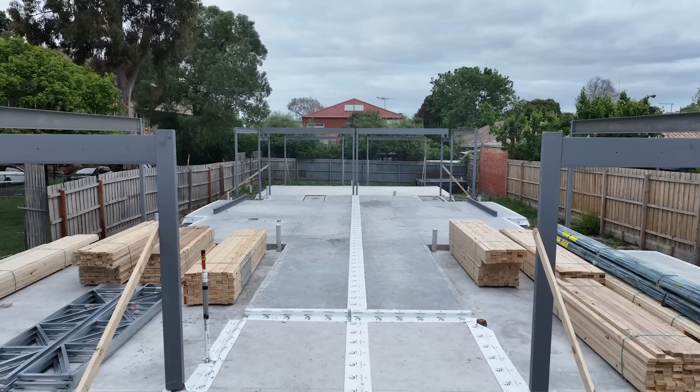Okay, we're back out on the frame, and today is going to be our first proper day building here. I was here a few days ago to film the first episode, and we marked out where all the walls are going to go on the slab. Since then, the steel has been installed, and now we've got our timber dropped off.

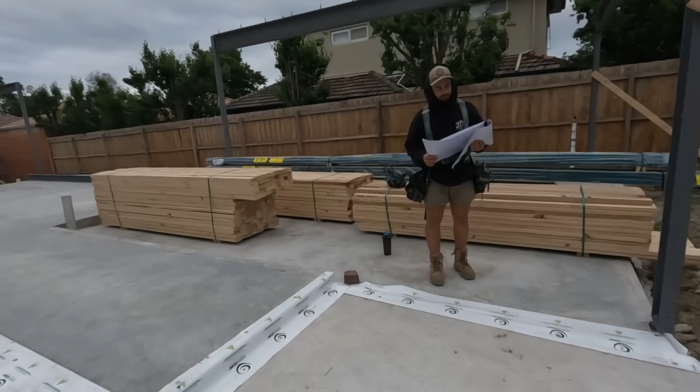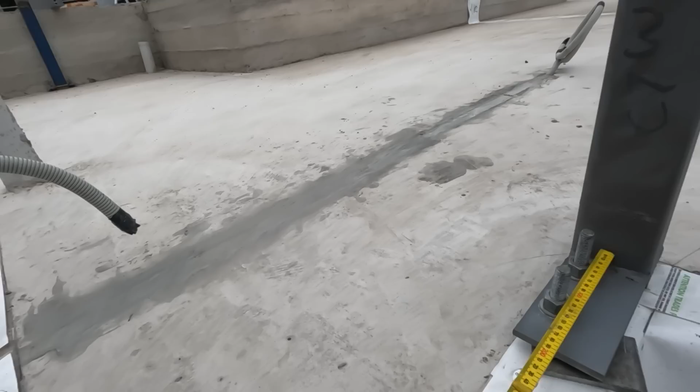So the issue we had is that these power trusses can't be checked out over this tag. The whole point of the power trusses is both sides need to be bolted down into the concrete, and that will stop it moving side to side, and that's what braces the house.

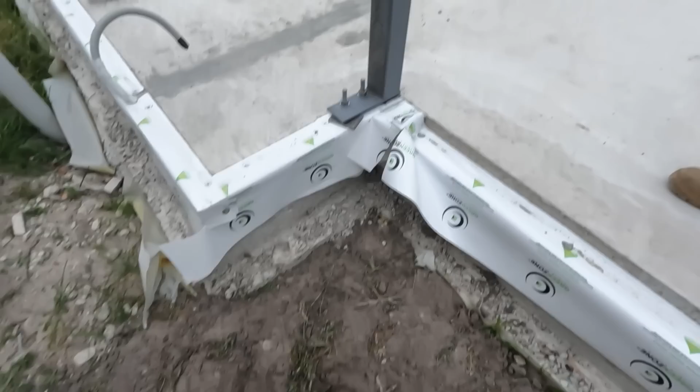So ideally this tag can't really be here. For now though, I think all we need to worry about is when we build our walls, we'll make sure we stop these external walls here, and we'll leave that open, and we'll sort that out when we see the builder. Same with that one there.

And then I think it was here as well. So this external wall, we'll just finish in line with that, and we'll leave this out here for the power truss. Same on the other side, just those three places.

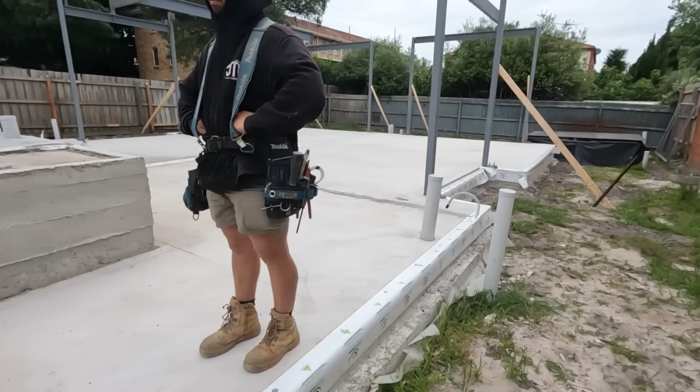So that might be an issue for all of them, to be honest. Well, I'll make a note of that. It's something we need to figure out, but for now we can just move on and start cutting the plates and work. We won't install those until the walls are up anyway, we'll just leave everything out for those.

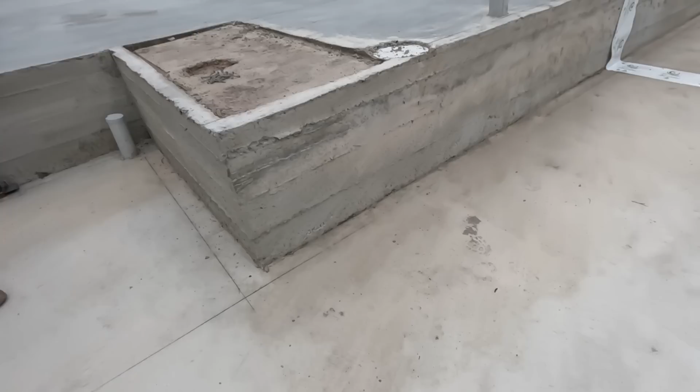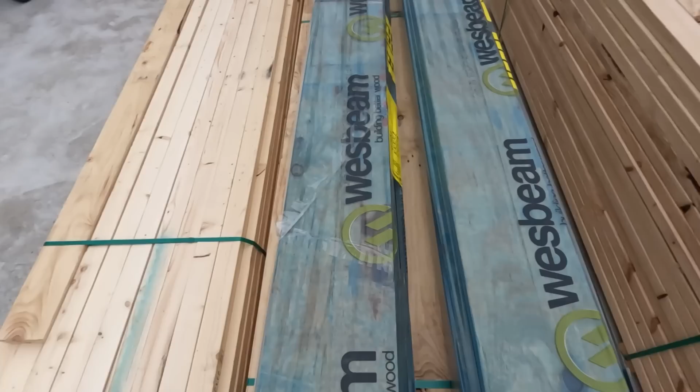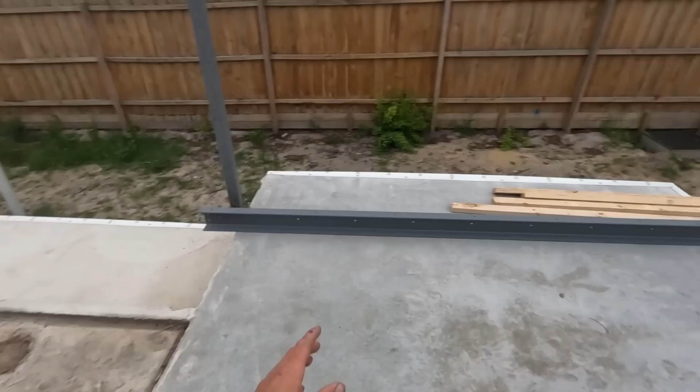Yeah, I'm just looking at it. There's actually not too many walls at all down here. I might start taking some down. I'll start down there, we'll stay in this unit for now, we'll get one unit completely done. But yeah, I'll take everything down there, start at the back.

Do you want to start up here? Okay, and just remember what we went over with the set out, that this here is completely wrong, because there's obviously no wall sitting across there. That goes through, and it's going to butt in with that one down there. So maybe for this wall here, or any wall that's going to run in and hit that lower wall, the same as this wall through here, we'll do it together with the level, and we'll plumb up, go across 90 mil, just to make sure everything's perfect.

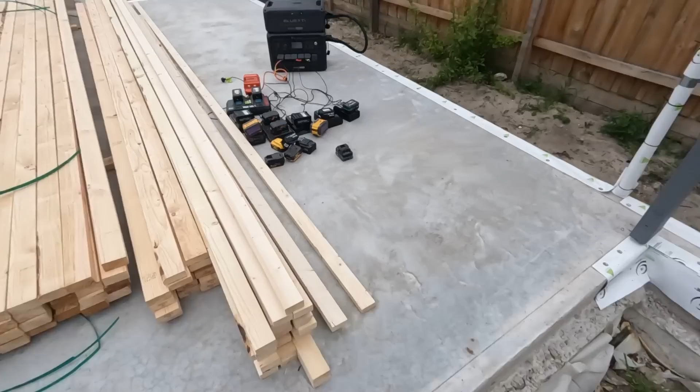You all good with what you're doing? Yeah, sure. Sweet, cool, I've got a saw out. What's charged? That's all right.

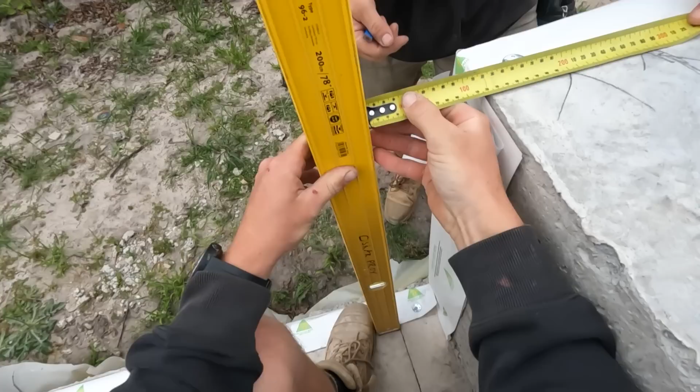I reckon we'll make a 91 mil gap. Mark 200 mil, or mark 191 for now. Maybe do that. And just measure to that point and then add 100. Yeah, okay, and yeah, then that's good.

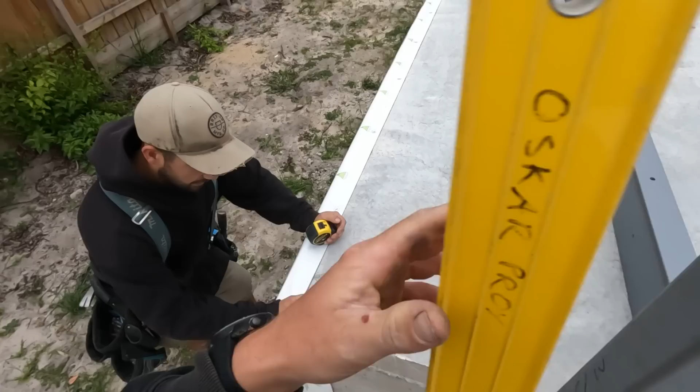Then that wall up there is going to overhang, and if we build a wall through there, it's going to tie everything together. While I'm here, we'll do the same thing for this one. Actually, no, we can do that one later. We'll do the same thing over here for the party wall.

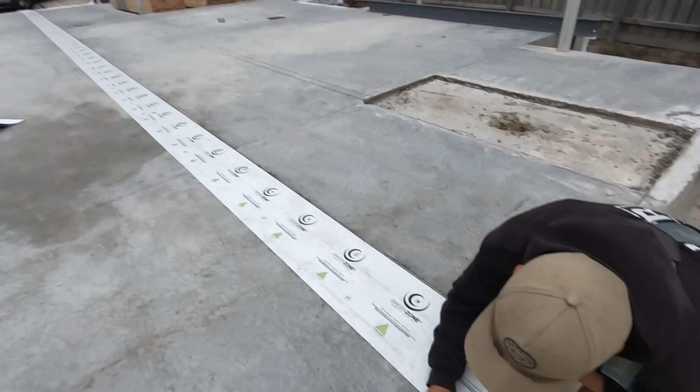Yeah, because we flicked that, but there's no wall up there. This is the only wall down here. So yeah, we'll just do the same 100 mil datum. And that's it there. Cool, sweet. Yep. Sweet, awesome, thank you.

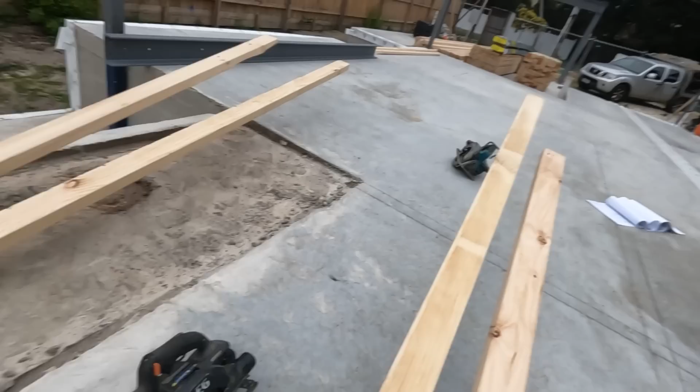And you're all good cutting in? Yeah, I haven't done a whole heap of it, but yeah, I should be fine. Cool. One thing to think about is we don't have any long continuous walls here, so it's fine.

I was just going to say we don't want to stop and start a wall plate where a window is. Another thing we're going to make sure we do is if we have two timbers and we sight them, whichever one has a slight bow in it, we want that to be the bottom plate.

Because it's going to be easier to get the bottom plate straight, shoot that into the concrete, rather than the top plate. The bottom plate we could put fixings in however close we want to make sure it's straight, but for the top plate, it's only where the posis land every 450. Or trusses, I think there's some trusses at the back somewhere.

If they're crazy bowed, obviously we won't use them. We just want to make sure the top plates are pretty straight.

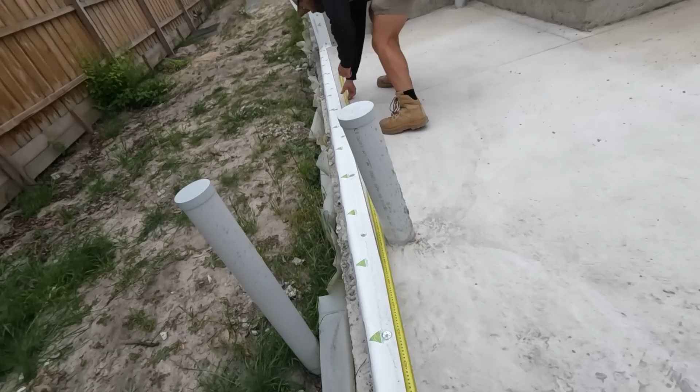Awesome. I might get a quick hand. Can I borrow your tape for a second? I'll have one in my car, I'll get it. Just for this one here, because I want to go in between both of these lines. So I just get you to hold me on that line there, please. Yep, so I've got 4640. That sounds good. Thanks, boss.

And obviously too, before you cut them in, just keep checking the other side of your timber for square.

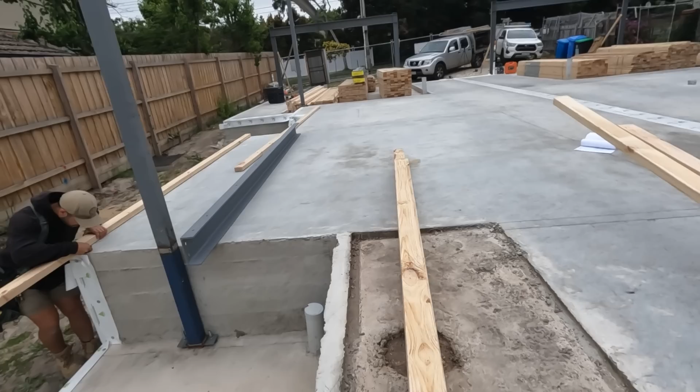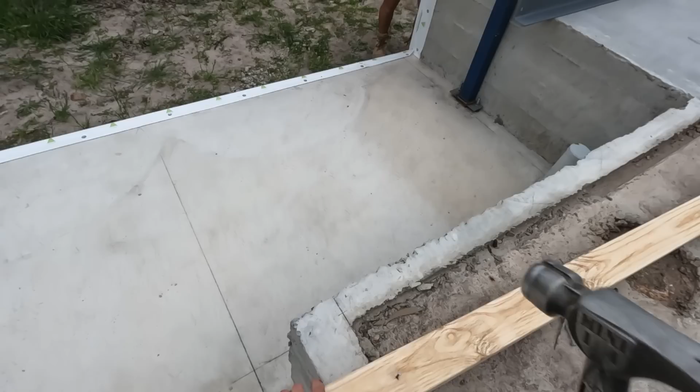Both pretty good. Hopefully all the timber's pretty straight. Sweet. It's good there.

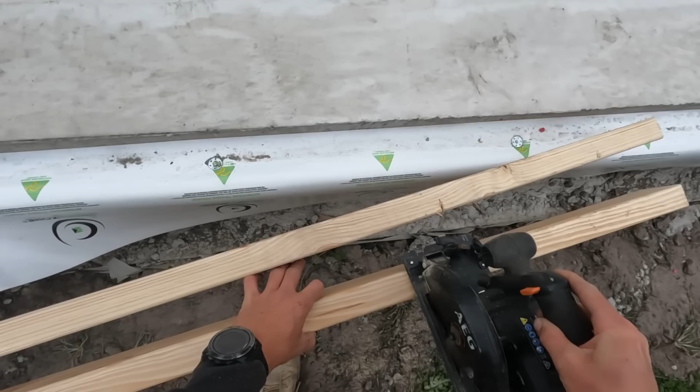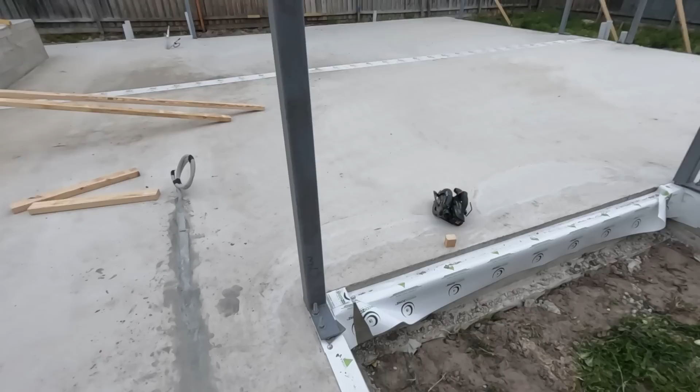All right, so if you don't know what we're doing right now, these are going to be exactly where our walls are built. So in the first video we went through, we flicked all these lines showing where the walls are going to go. And now these are going to be the top plates and bottom plates of our wall frame.

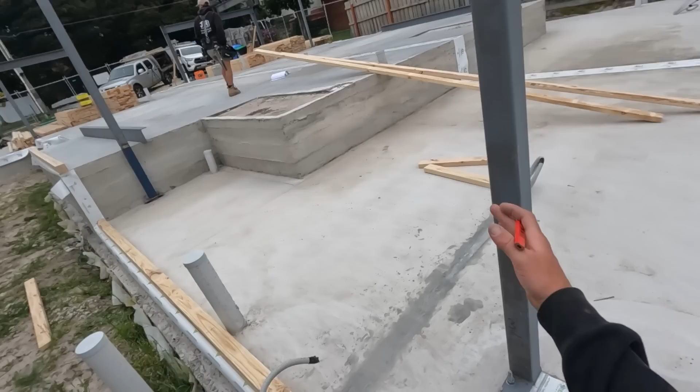So we're going to go through and cut through our plates everywhere that our wall is going to go. And once they're all laid in place, we'll go through, mark out where the studs go, mark out any window openings, any doors, any special features. And then we'll open these up, put studs in between them, and there's going to be a wall stood up right here where these plates are.

All right, so that's a pre-cut, pretty much done. Most of the walls are cut in. We didn't actually have enough timber to do the garages, which is fine. We'll worry about those later. And I think there's 2 walls through there that we didn't have enough timber for. Apart from that, everything else is cut in.

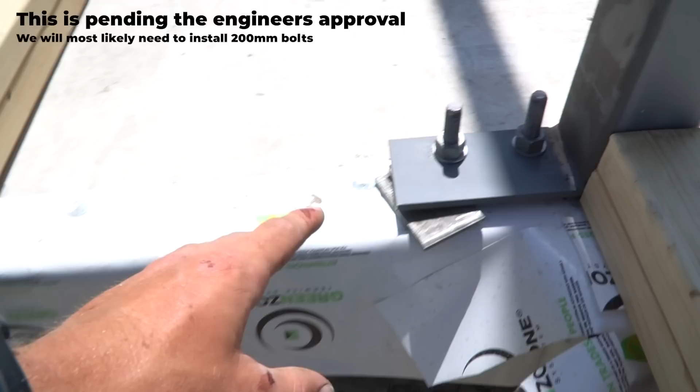We did speak about it this morning. I've left those little ones out for the power trusses. And I've actually spoke to the builder, we've got a plan of what's going to happen here. So I think what we're going to do is remove one of these nuts and sit the power truss through that thread. And now that I'm saying that, I don't know if it's going to work.

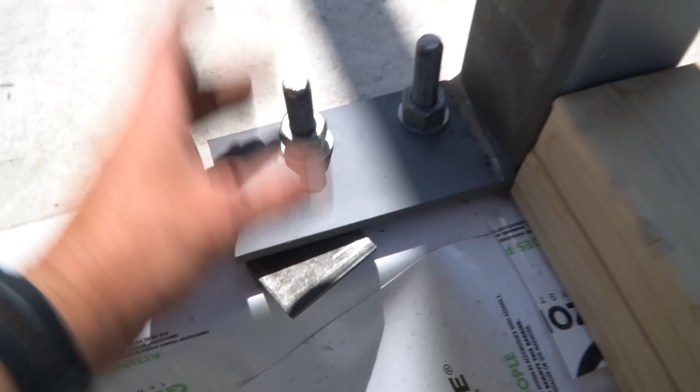The idea was to sit the power truss on that tag, use that thread to hold down the power truss, and pack this side up and bolt it into the concrete. The reason I don't think that's going to work is because if we have a look straight down, this is about 25 to 30 mil in from the edge of our wall line. And if we have a look at the power trusses here, these are the bottoms of them, we can see that hole is centered. So that still might be an issue we have to figure out a little bit later.

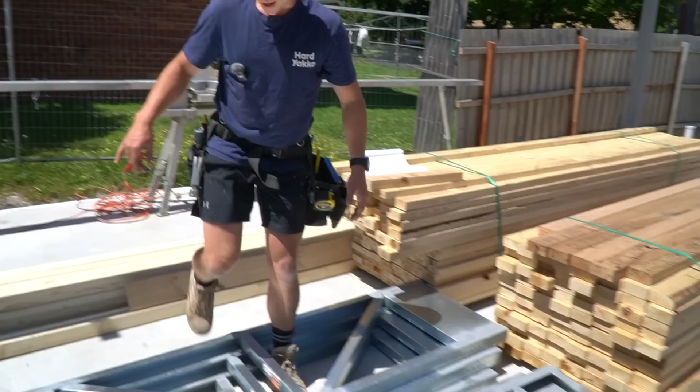We'll leave these now though. And for now, what we might do is I might actually sit up and start marking out all the plates. It took a bit longer than I expected to get all the plates cut in. We had to deal with a few things. The posi guy came up and we measured all the posis for upstairs, went over a few things with the builder.

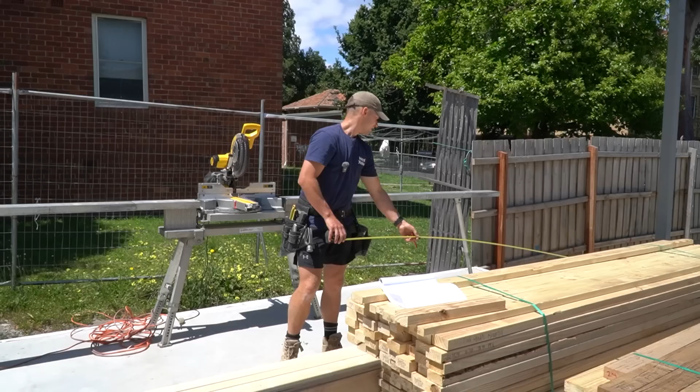But I'm going to go through, start marking everything out. While I do that, I'm going to get Oscar set up on the mitre saw, cut in all the studs. So those studs are 2.7 90 by 35. These are 3 meters 90 by 45. The 3 meter studs, they're going to be for the garage.

We got another stud pack here. Okay, cool. So these, yeah, once again, these are all 45. And these are 3.6s, and they're going to be for the back section. And these here should also be 2.7 then.

So looking at all these studs here, what I think is going on is that we've got firstly these 3 meter ones for the garage. I think these 2.7 90/45s are going to be for the external studs for up here. And the 35 2.7 ones are going to be for all the internal walls. I'll double check that with the builder.

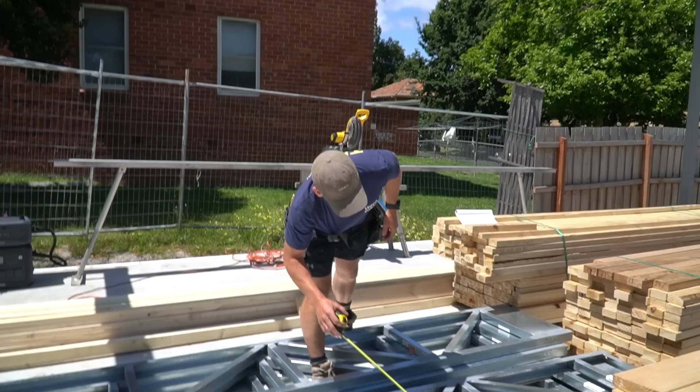And then, yeah, same thing for the back. They're all just 90/45 full size studs. So if we have a look here from the finished floor line to the ceiling line, we do have exactly 2.7.

For the back section back there, we've got 3420. And for these garage walls, it's going to be that 2.7 plus whatever the step down is here.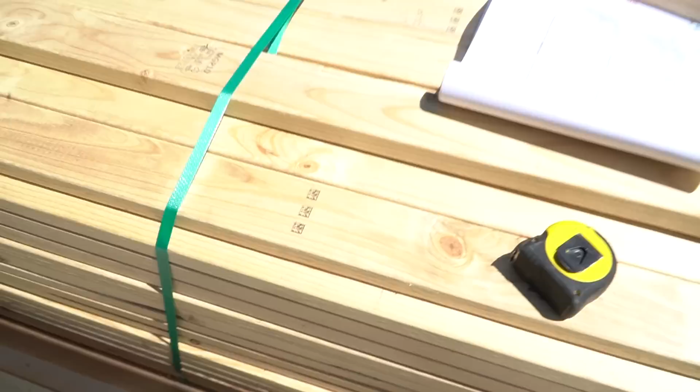So for the 2.7 studs, obviously the finished wall height is going to be 2.700 minus that 45 top and bottom plate which we've laid out, and then we're going to do a 90/35 pitching plate. That's 125, meaning that the studs should be 2.575.

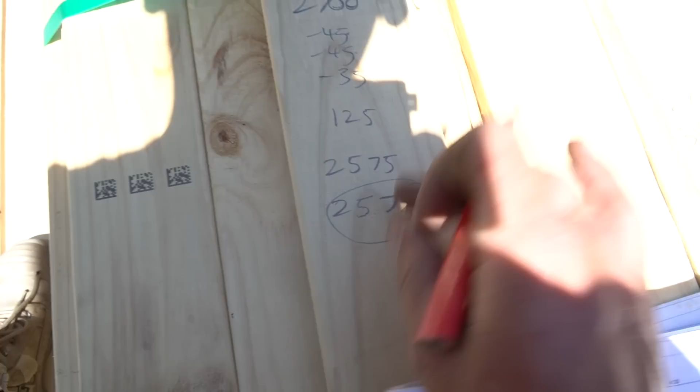What we always do is, because once you put a few plates and studs together, even though they're exactly 45, 45 and 35, they will end up being about 126 to 127. They kind of do have small gaps between them. They expand a little bit, but I always decrease the stud size very slightly. So we'll go 2.573, and that will end up giving us the perfect 2.7 height. We'll double check that once the walls are up, and I'm sure we'll have exactly 2.7 if we cut the studs to that measure.

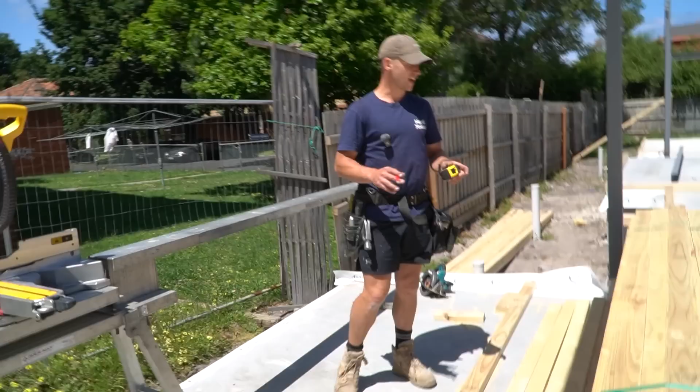I'm just trying to work out a bit of a plan too, because obviously the garage is going to be perfect for storing stuff. Today we're going to want to get all this timber out of the garage so that when the Hebel comes, we can stack it and leave it in here. We're not going to be able to frame this garage wall, so maybe we cut all these longer studs.

Do you reckon it'll be alright if we throw it down there? Let's just leave them down there then.

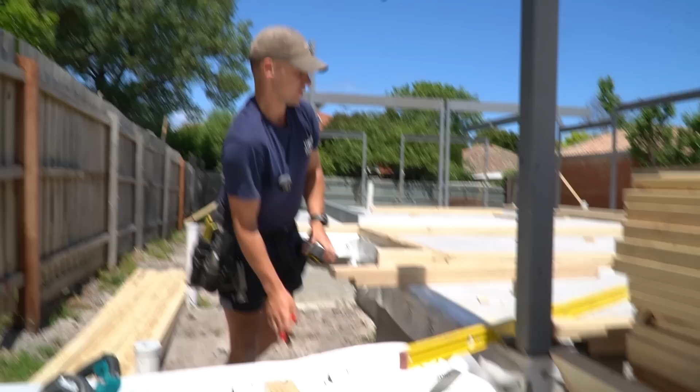Okay, so to get this height, we've got a difference. I'm exactly 147 there. I'm pretty sure it's meant to be 150. I'm going to check a few points, because what I don't want to do is measure off this one point here and find out that maybe the slab kicked down a little bit there and have everything wrong. So we'll measure there, 147.

We'll do the same thing at the front over here. That's right on the money at 150. We'll check this side here too. Should be 150.

About, what's that, 134, 135? At this point, I'm thinking of just doing the 150 of what it's meant to be. Yeah, we've got about 147 there. So it's obviously meant to be a 150 step down.

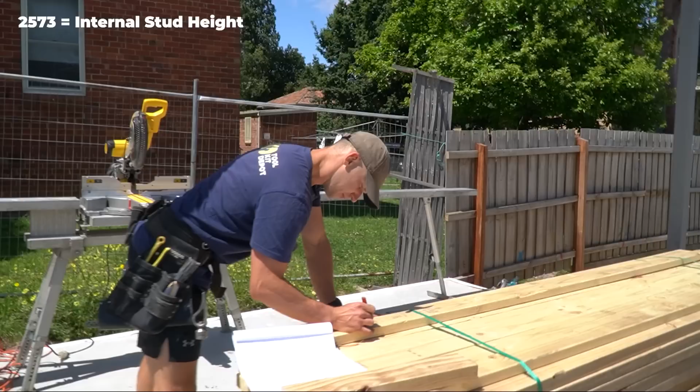We'll follow the plans, and we're just going to have to deal with what's happening over there when we move on to the subfloor. So these garage studs are going to be that 2573 we had, plus 150, which should be 2725. Well, sorry, 2723, because we're going to remove that 2 mil once again.

I've got the Bluetti set up once again, and we're going to be using that to power the miter saw. Actually, I've got it turned off. You turn that on with your phone? Yeah, with the app. Yeah, that's right.

Can you zoom in? Can you see that? So this is the app that's actually connected right now. We're connected, so you can see we've got 100% power. The reason we've got 100% power, even though we've charged about 20 batteries this morning, is we actually do have power on the site. So I charged the batteries, and I did want to charge it up completely so that once we start using the miter saw, we can see how much power it's going to drain through.

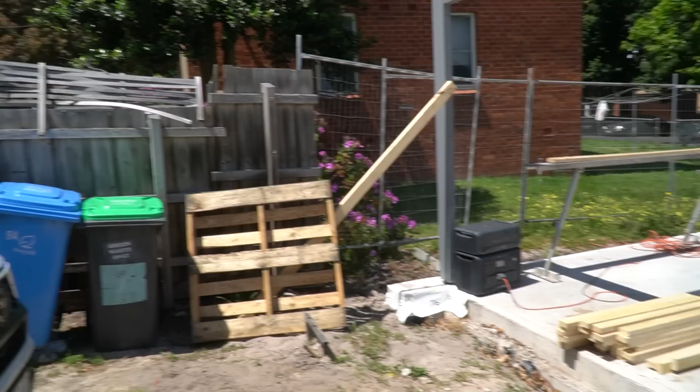Right now we've only got the miter saw plugged into it. We might get the compressor later. I think if I click... oh, we got AC here. Your finger looks messed up. Oh yeah, I've got cuts all over myself. Turn on the AC output, okay.

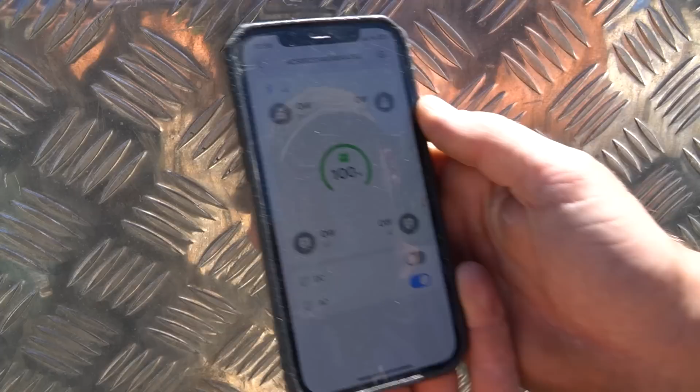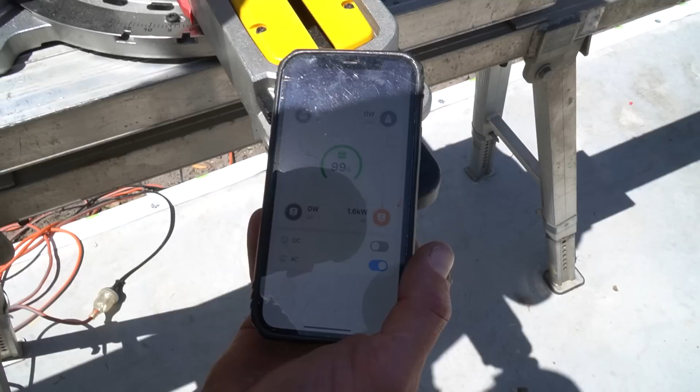All right, so I think now with that on, it's going to be pretty cool. That is mint. Have a look at this. So we can see the AC right now. I'll put the miter saw on. There we go. It tells us exactly how much power is getting pulled from it. So that's pretty sweet then.

If you're happy with that, I'll leave you doing that, cutting all these larger studs. We might stack them over there out of the way for now. And if you're sweet to do that, I'm going to jump over here. I'll clear out the slab and start marking out all the walls.

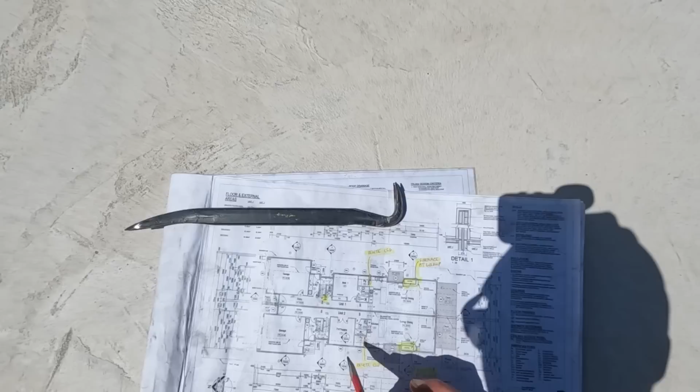Alright, so I'm going to start at this back corner here. I'm just going to make our way through. We'll do all the lower sections and then make our way to the top. I'm actually looking at this, and this mark out should be very easy and very quick. For starters, we've got this wall here, and it is just a common stud spacing wall. So it's just 450 centers everywhere.

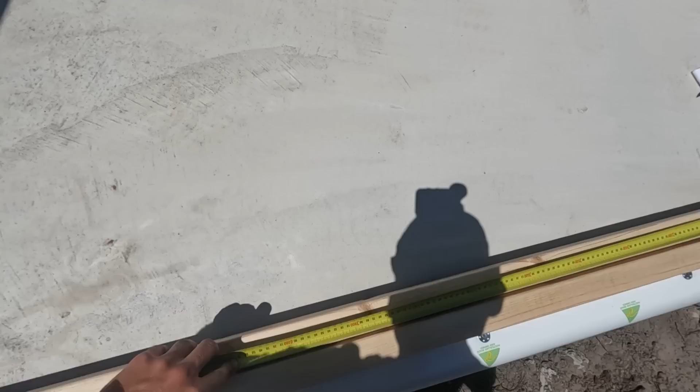We've got 450, 9, 1350, 18, 2250, 27, 3150, 36, 4050, 45, and we finish at 4950, and we'll do one at the end. I'm pretty sure that little kick in there too.

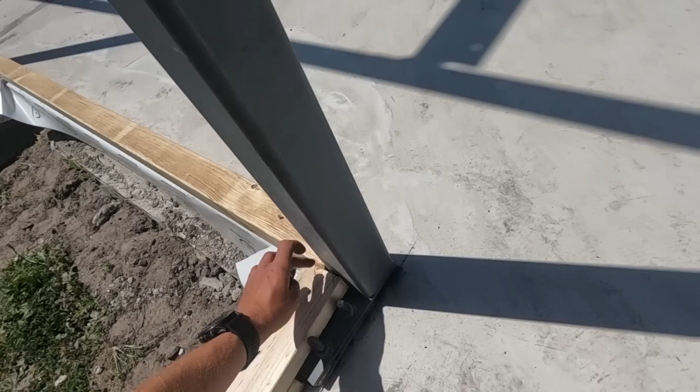I think what we're going to have to do is frame up 2 studs there, and we ideally are going to have a stud there. I'm not going to mark it now because I want to build this wall just for those 2 studs. Then we need to put a stud in from the top there, hard to the steel, screw it onto the steel. We'll leave that open so we can easily get that stud into the steel, and as we do that stud, we'll have to put the stud in here too. So that wall's done for now.

Where was my square? Let's go through and we'll quickly tick this one.

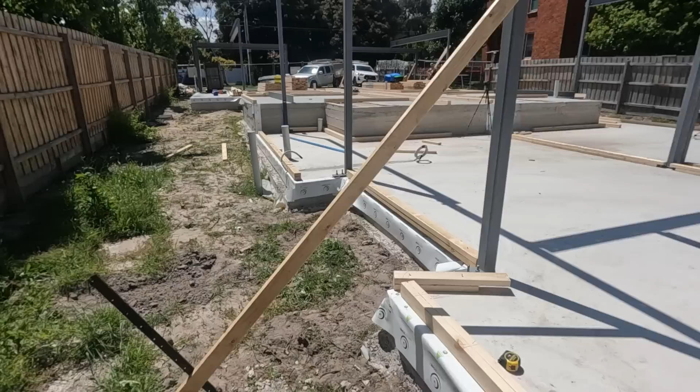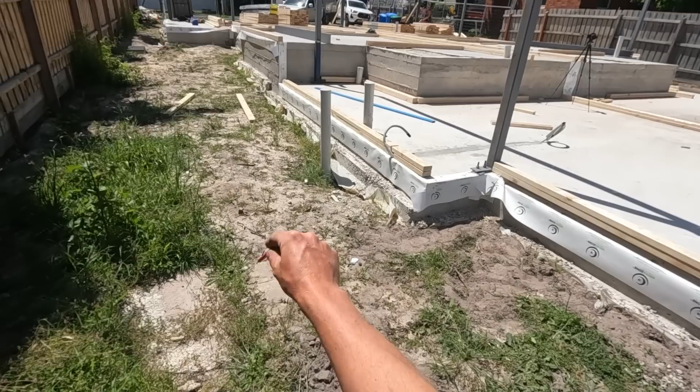Right, so for this one here, we did have a look earlier. We do have the rebate down there for the slider. It does say in the plan we've got door 10, and actually there's a nice little deck. We got the little pads for the deck post to go in here too. We've got a nice little deck going in here, which we'll probably build once almost everything's done with the job.

And we're all sweet. All I wanted to make sure is that the door isn't crazy high and it won't go up through the subfloor. Obviously we've got steel there now that I look at it, so it's not going to be an issue. Door 10 is 2.4 wide and 3 meters high.

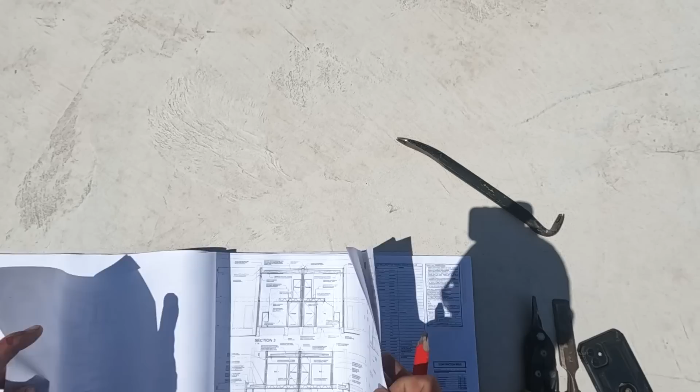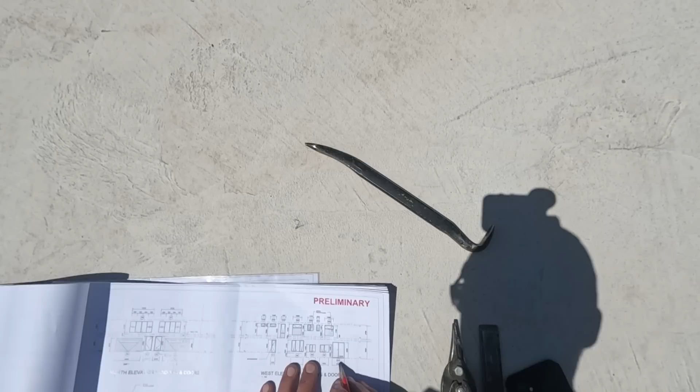And that was centered from memory. I believe this was 2.7. So we'll go 1350, half of 2.420 is 1210. So I'll hold 1210 there. I'll mark 2.420. 2.420 there. Do a tick here.

Just to double check we're right. We got about 138 on that side and 138 on that side.

And the last thing we need to check before we mark in any studs is if there's any lintels. You can see in the plan there we've got lintel 5 and just steel columns either side. Lintel 5, L5 is 200 by 75 PFC, which is that steel we see up there. And as I'd expect, we're framing this up inside the portal. So what we'll do is just cut the studs here to be tight to underside that steel. And then she is all sweet.

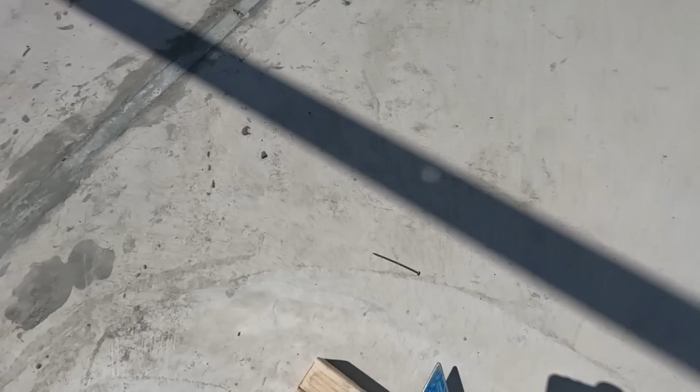So for this one, I'm going to do a line there because that's where the door starts. But all we're going to do first is these end studs, so we can screw it to the steel and then we'll put those door studs in later. I'll probably double those studs up too, just so there's no movement at all in them.

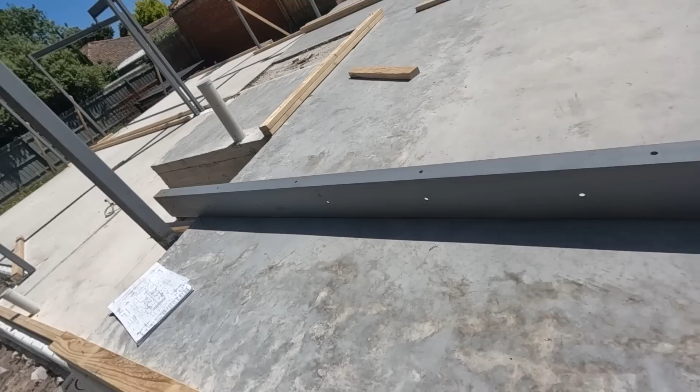But I'm going to go through what we do to mark out these windows. The last few jobs I've done had plans, and the plans actually had running measurements showing you exactly, we're looking this way now, but the plans had another line here with measurements which showed you exactly where the window started and stopped. So I'm looking at this invertedly the wrong way now.

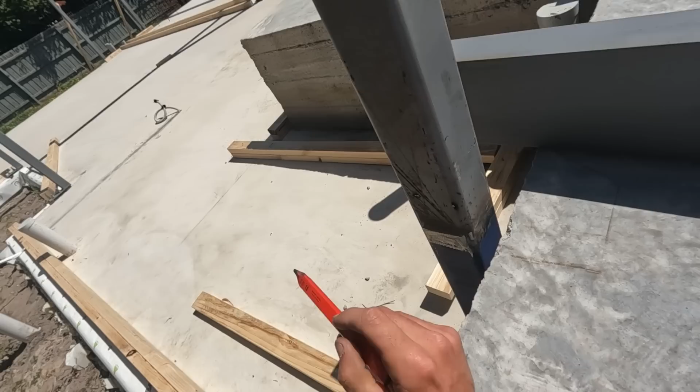Where I am right now, we've got window 1, and on that wall there, we've got window 2 and 3. These ones actually look pretty straightforward. We can see window 1 is centered in bedroom 1, window 2 is centered in the pantry. We see that pencil line on the slab there. That wall was meant to run through. It's been deleted. We can still see that that window's centered as if that was a wall there, and that's a separate room. And same with the kitchen window there, window 3.

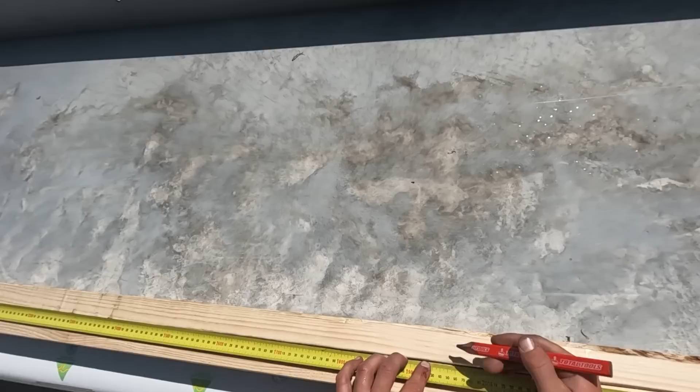So what I might do first thing is for this wall and both of those, let's just find the middle of the walls and we'll do a centered mark. So that's going to be the edge of the bedroom there. And we're going to finish 3905. So half of that is 1952.5. That's our centered mark.

So I'm just going to extend this line through. Oh, we've actually got a mark there now. And I just want to make sure this is where it needs to be, which is there. All right, so if I hold that on that mark there,

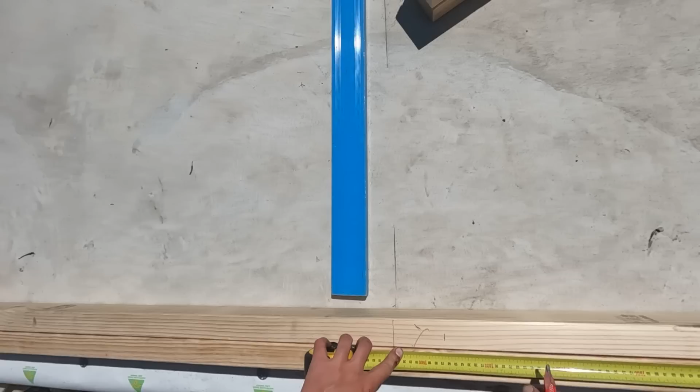we've got 1860 in here. Half of 1860 is 930. I'm going to leave that right there. Mark 930. That's center of that room. We hook over here to the inside of that wall. We've got 2.7, so the center of this space is 1350.

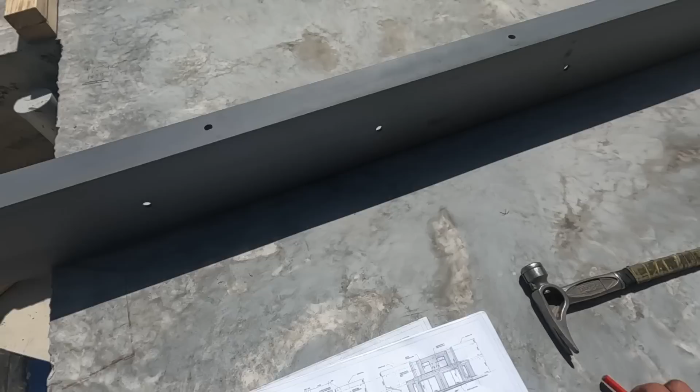We just want to make sure we check that. In this whole plan, it looks like every single window is going to be fine, but sometimes you have taller windows that go through into the beam space. We're just going to work that out now, because obviously when we frame our walls, our lintels won't be sitting in the wall, they'll be sitting on top of the wall, and I want to make a special note of that. So what windows was I looking for?

We're looking for 1, 2, and 3. East elevation windows, I think. 1, 2, and 3. All right, so we're at 2400 by 21.

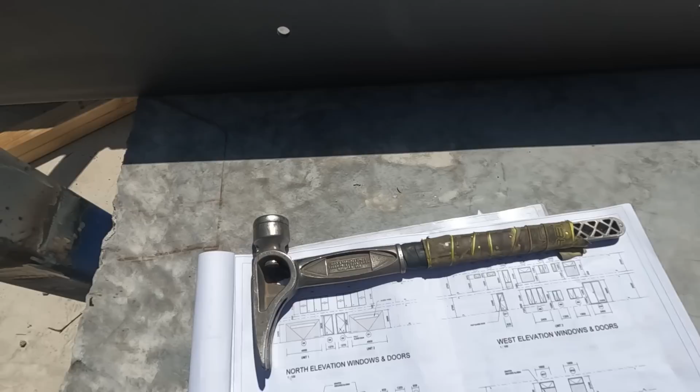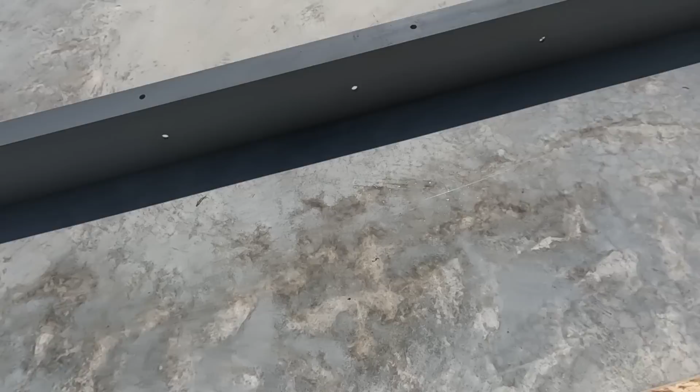I've had a look at the window schedule, and all of our windows for widths and heights need plus 20 mil for the frame opening. So for window 1 right here, we've got 2420, and I'm just going to write that on the top plate to start with, 2420 wide. And then we're going to go off the center mark. So I'm going to do half of 2420, which is 1210, and I'm going to leave that on the center mark, extend my tape, double check that's fine, and I'm just going to do a mark this side and a mark at 2420.

And that's marked out for this window to be centered in this room. I'm not going to tick for any studs yet. I'm just going to leave that as it is, because we still have to have a look at the engineering plan to see what's happening here.

The next window down there, we've got window 2, which is 1200 wide. I'm going to turn that into 1220, and we'll go 610 either side of the center mark. So I put 610 on the center mark. I'm going to tick 1220 at the end of my tape there.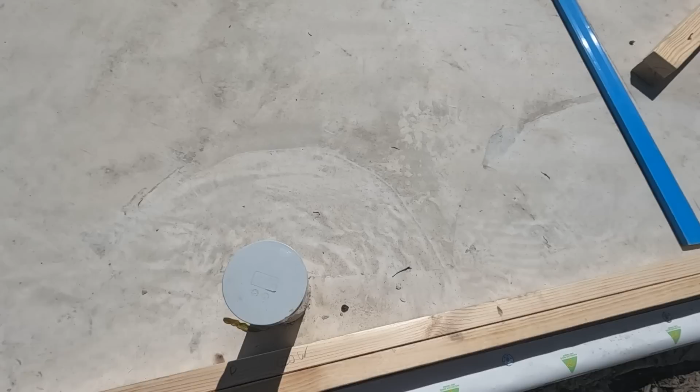And window 3 is 1800. So we're going to make this one 1820, pretty straightforward now. 1820 wide, and hold 910 on that center mark. 1820.

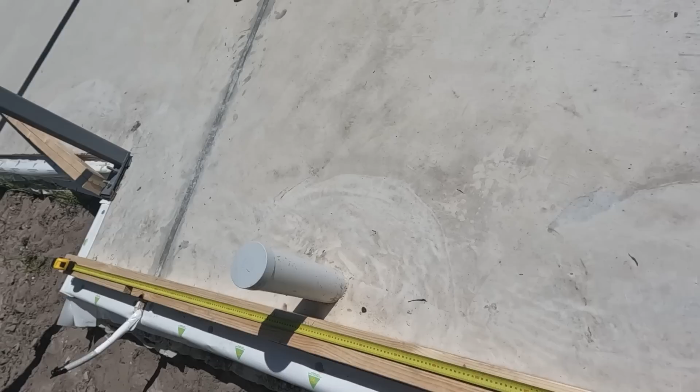910. I always advise doing this and have your tape running continuously, as opposed to marking 910 this way and then spinning your tape and marking 910 that way, just because there's room for error. If your tape's slightly off one way or the other, you can lose a few mil. If I'm doing a running measurement this way and I lock my tape, if I knock it and it's not exactly centered, I might knock it back and forth. We're still going to be marking 1820 here at the end of the tape, so the opening should still fit the window. We've got 10 mil of play either side to move the window back and forth. As long as I'm not knocking my tape 10 mil, which I should notice and fix. But if it's a few mil here or there, we can still fit the window in and move it back and forth to be centered.

So I'm just going to square these. We've got where the window goes. And the next thing is to check what lintels we have in here and what load studs we have in here. So we're looking up here. We've got L4 for the first one, which is the lintel.

L stands for lintel. L1 for the second one, and L3 for that one, oh, for this one here, sorry. What we do actually have for this one right here is L3, brackets we got an O, and above that we've got SB1, brackets we got a U. U stands for under, the O stands for over.

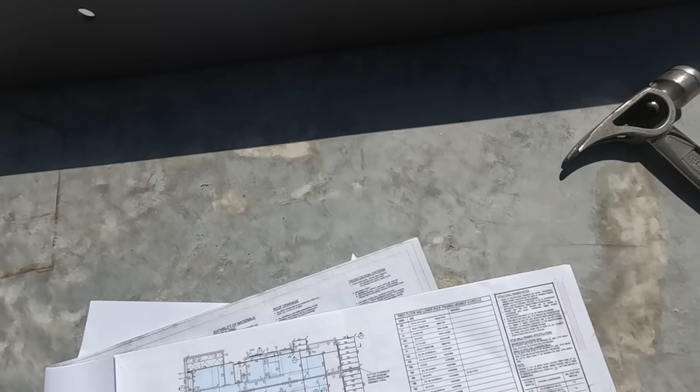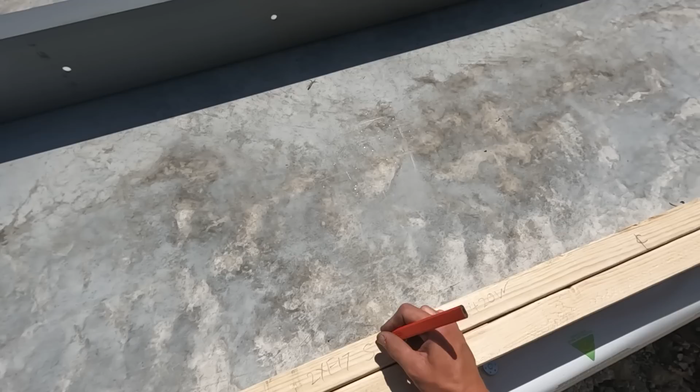So if we actually have a look at SB1, it should give us a bit of an indication of what's happening. SB1, it says here, it's two 90/45 F17 hardwood studs on flat for the sill beam. So what that's saying is we're going to be framing a window up here. I'm just going to write down 2 times F17 sill.

I'll know what that note means when we get to it. But we're going to have a window. The sill is the bottom of the window, and it's asking for a double F17 at the bottom of the window. The reason it's got that there is so that sill plate doesn't flex in and out and bow over time. That's the entire reason for that sill plate being F17. I've actually never had this before, especially for a 2/4 window. That seems pretty full on, but that's what the engineer asked for.

So that's going to go underneath the window. And then we've got the over mark, which is an L3. I can see here that's a 140 pine, so I'm just going to mark 140 pine here. And I don't really normally write this, but I'm going to write lintel, just so we don't get confused by the sill and the lintel. So that means these studs are going to continue up, and they're going to have a 140 checkout above the window, and that beam is going to hold all the way to the roof that goes above the window.

If we look back at this plan here, we can see in both corners we have a DS1 mark. It actually says DS1U for under, and I want to double check this, because that's possibly saying that the double stud isn't actually going where the studs are going. It could actually be a sill stud going underneath that F17 sill plate. I'm just going to write F17 over here for now.

This is something I want to confirm with the builder because I've got a feeling it could be on the other side just to hold that sill plate. We did check earlier that if that 140 lintel sits below top plate height, it's not going to be in the way for the window. So that's all good to go.

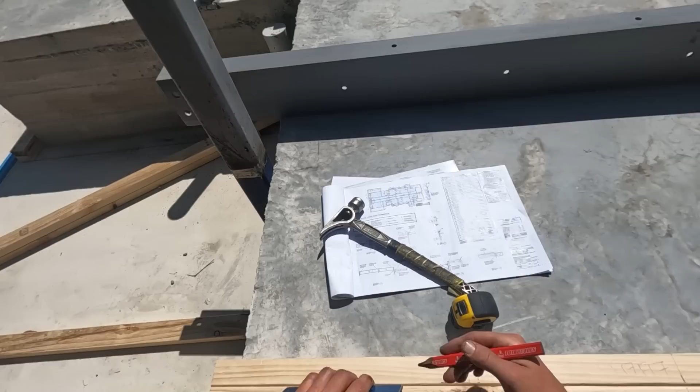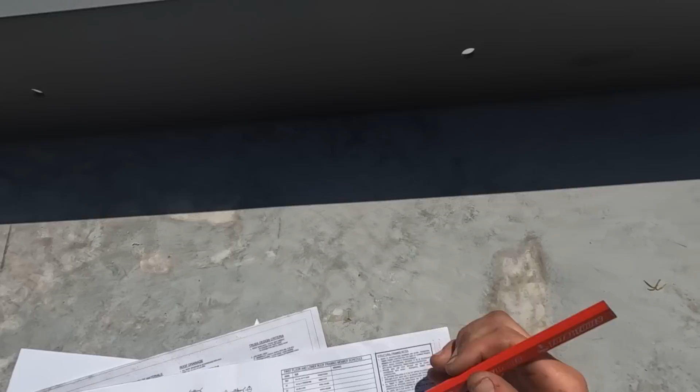For these two over here, they're a bit more basic. We've got L1, L4, no other marks. Normally when you look through the plans, we've got ground floor load bearing walls here, and there's a note down here that says provide 2 90/45 studs under the ends of all lintels. So when there's no marks there, it's just going to be a double pine stud.

So we got L1 first, L4 second. L1 is a 90/45 pine beam, and L4 is a 140 pine beam. So I'm just going to write 90 pine here, and over here I'm going to write 140 pine.

Since it's a double stud, we're going to have one stud with a checkout for the beam to sit on, and another closer stud next to it. One way I make it easy to interpret for whoever's framing these walls is I write a W for the window mark, and the W represents the stud you're going to do the checkout out of, and the X is a closing stud that's going to be full.

The reason I do that is sometimes you get triple studs, and the plans change on how many studs are going to be checked out and how many are going to be full closing studs. So if I do a WWX, it means 2 checkouts. If I do a WXX, 1 checkout. It's just one little thing I picked up to minimize mistakes we make on site.

So we do a WX for this one, and I think that's it for the window. I forgot to write down the height, which obviously I need to do as well. Can't even write a W. Yeah, I'll find the window height, we'll write it down as well. I normally leave it until we frame the walls to actually mark how high the window is sitting. We'll get to that when it comes to framing stage though.

Right, so Oscar got a start on the pre-cut. I think these are the ones he cut here for upstairs, and those ones down there are the garage ones he started with. What do you reckon, is that like 80 studs? That plus that? Probably, might even be close to 100 plus, to be honest.

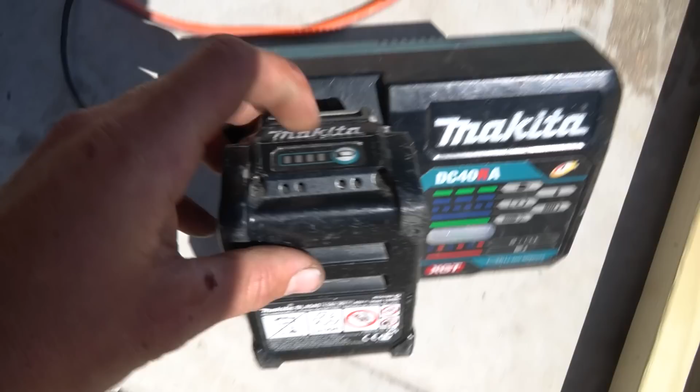I want to see how the inverter's going. That's the story, I'm guessing this is fully charged, which is good. So we saw some battery there, and it's so blurry I can't even see anything right now. Let's go back.

I don't know if you're going to be able to read that, but she's at 87%, which I think is pretty great, to be honest. I think we'll be able to cut through almost all the studs here and not get down past 50%. I mean, that's it done for day 2 though. I told you what I was wanting to get done at the start of the day. Obviously, we're a bit behind schedule. I was hoping for more.

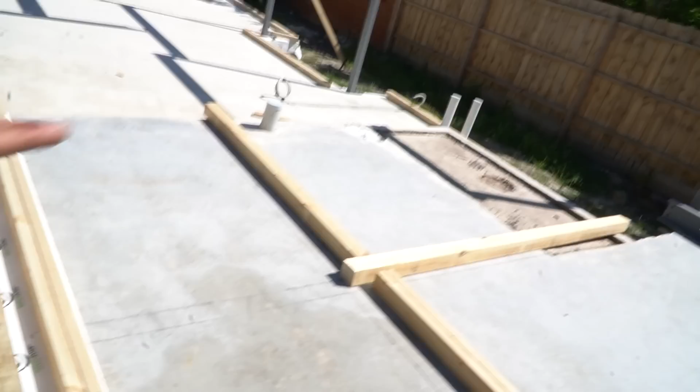So all the plates that we can have been laid in. We're missing 1 plate there, 1 plate through there, and the garages. We need more timber for that to be done. On the bright side, this entire unit here has been marked out. Studs are marked, door openings are marked, lintels, windows, everything's good to go.

We're waiting for a couple other guys to come here and help us out so we get a move on with this job. But I think there's a chance it's just me and Oscar on Monday, so it's going to be interesting to see how we go with these walls. But I'm pretty happy we've got some progress on the job. I think once we've got some actual walls stood, it's going to look a little bit better. But that's episode 2. We'll see you in a few days for episode 3.